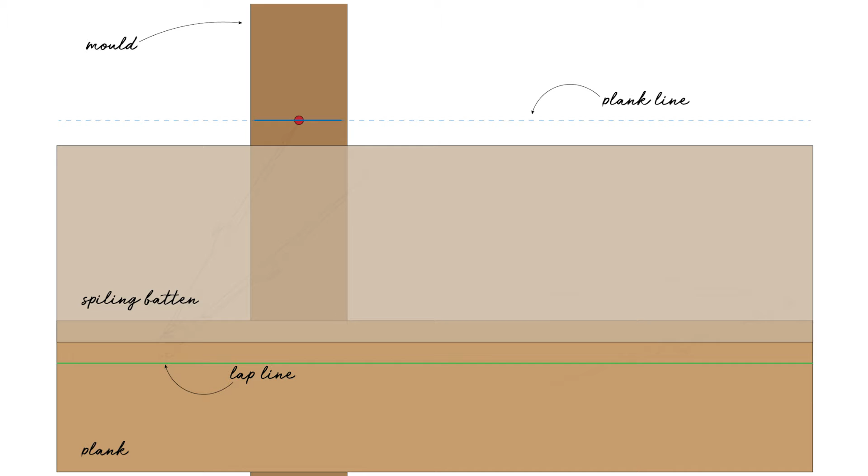You can see that the plank line is also indicated here, and this is the line that you generated when you were lining off the hull. So we'll choose a point on the mould that's also on the plank line. The choice of this point is completely arbitrary. Then, setting the point of our compass on this point, we'll swing a small arc onto the spiling batten.

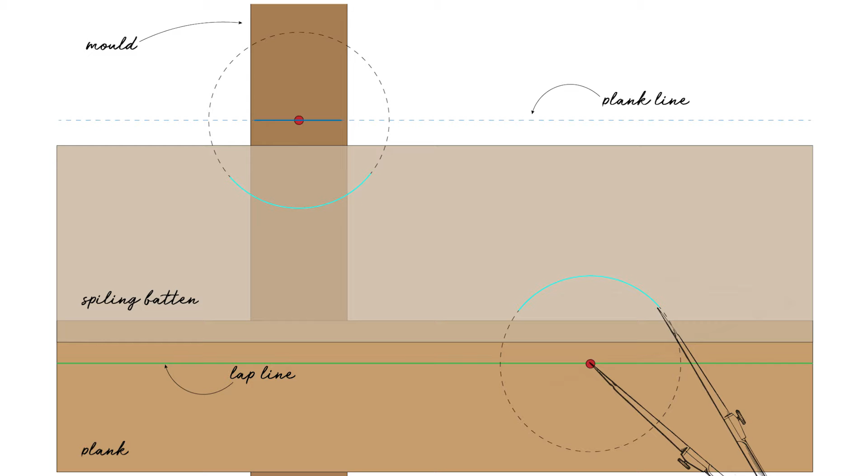So now you repeat this process, but instead we're going to use a point on the lap line below. What's key here is that throughout the spiling process, you're always using a compass that's set to a fixed radius. Otherwise, it won't work. So at this point, we've picked up the information we need from the hull. Now we're going to transfer it to some planking stock.

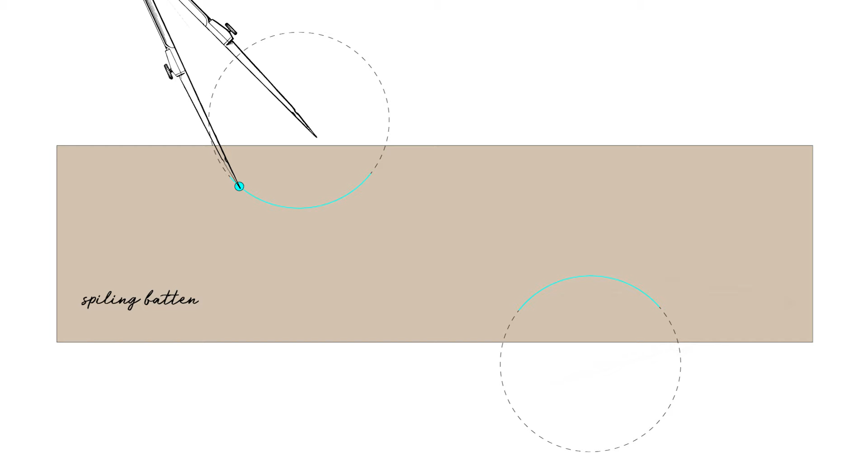We'll again choose an arbitrary point, but this time we'll choose it on one of the arcs that we just struck on our spiling batten. Pivoting our compass on this point, we'll strike a small arc onto our planking stock. Again, it's important that we're using the same compass set to the same radius as before.

Now we'll do the same thing all over again, but using a different point on the same arc. What you expect to happen is that our two new arcs will intersect each other. And thanks to the magic of geometry, these two arcs will intersect precisely at the original point that we transferred from the hull. This is how we get back to where we originally came from. So this process can be repeated now using the other arc that we transferred from the hull.

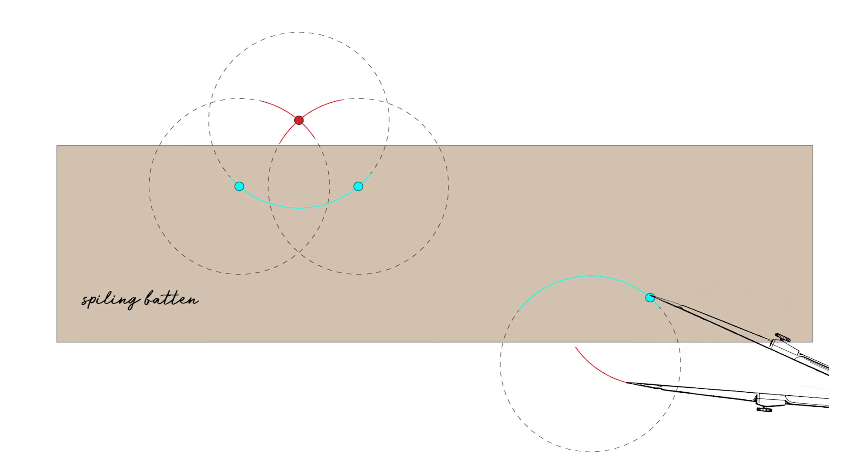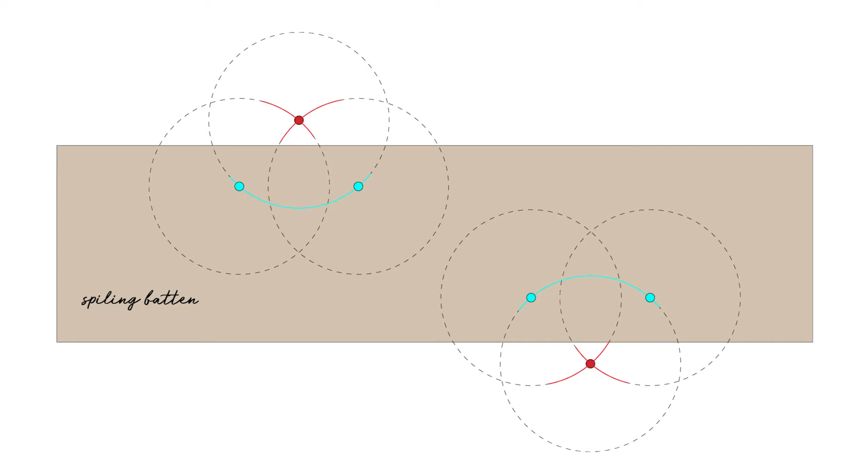So with all the points transferred, we can finally set aside our spiling batten. All we have to do now is fair together the top points and fair together the bottom points, and then cut out the shape of our plank.

So here you can see a lining batten being used to fair in the spiled points, and then the plank shape being cut out. A circular saw really is the tool for the job. Then there's a final shaping of the plank with a hand plane. Then one more planing before installation.

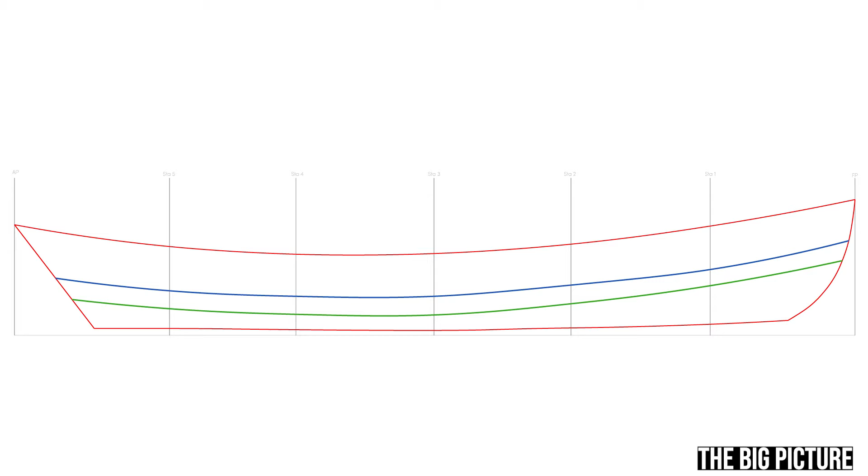So here's the big picture of the spiling process. You can see our boat in profile and a green and blue line representing the lap line and the planking line respectively. Now here's the spiling batten placed between the lap line and the planking line.

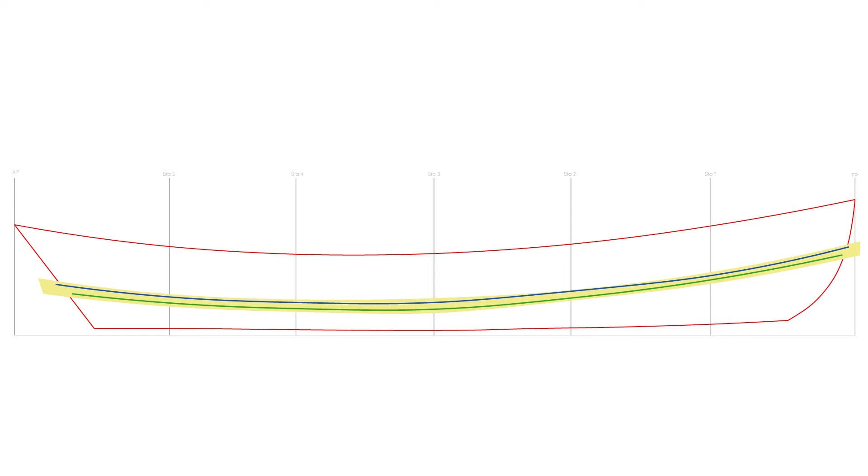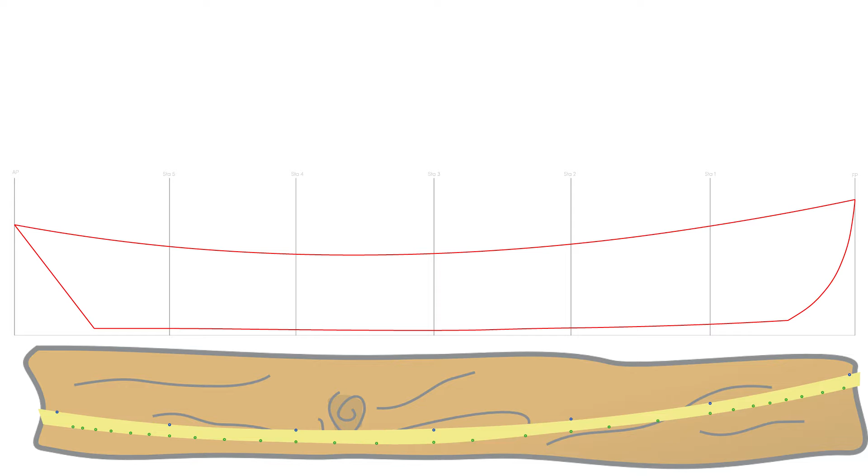What we'd ideally want to do when spiling is to transfer in their entirety the lap line and the planking line onto the spiling batten. But this isn't practical, so instead we approximate these lines with a sequence of points. The spiling batten is then taken off the boat, taken over to the planking stock, and all of these points are transferred to the planking stock using the compass technique described earlier.

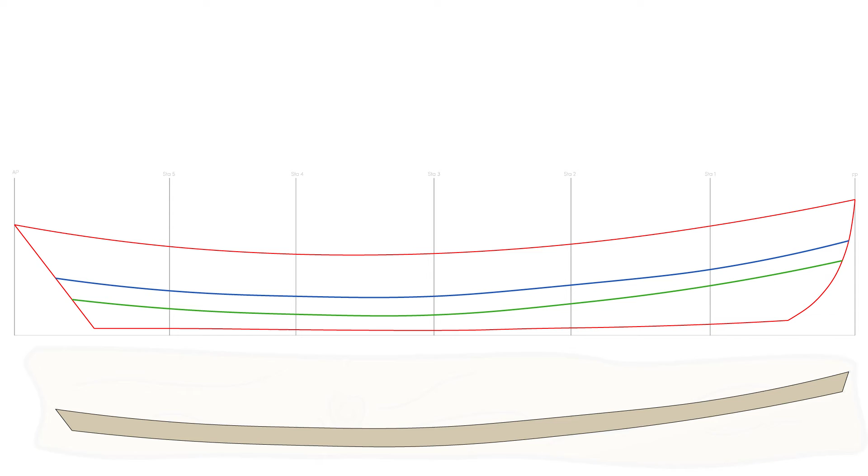The top points and the bottom points are then faired together respectively using lining battens to generate the plank shape. This is then cut out of the planking stock and then offered to the boat for fitting.

So if only spiling was as simple as I've so far explained. So the procedure is straightforward enough. Using a spiling batten and the compass technique, you're transferring information from the hull to the planking stock and then cutting out whatever shape that generates.

Unfortunately, there are some obstacles to getting an accurate result with this procedure, and it all boils down to the shapeliness of the hull. The more dramatic the curvature is in any particular part of the hull, the more challenging it'll be to get the spiling batten to give you reliable results. So what can end up happening is that when putting the spiling batten on the boat, you end up forcing it into position so you can hit all your marks.

This ends up causing a phenomenon known as side set. So what happens is when you take the spiling batten off the boat, it bounces back into its original shape, but because you forced it into position, that now distorts the information that you pulled off the boat. Now there are numerous ways to avoid side set in the spiling batten, and one of them is just to avoid forcing it into position.

But what I found worked best is instead of having one complete spiling batten that ran from bow to stern, I instead pieced the spiling batten together with smaller sections and then gusseted those sections together. There are a number of advantages to doing it this way. One is that you're not wrestling one big noodly spiling batten, which can be a pretty big headache.

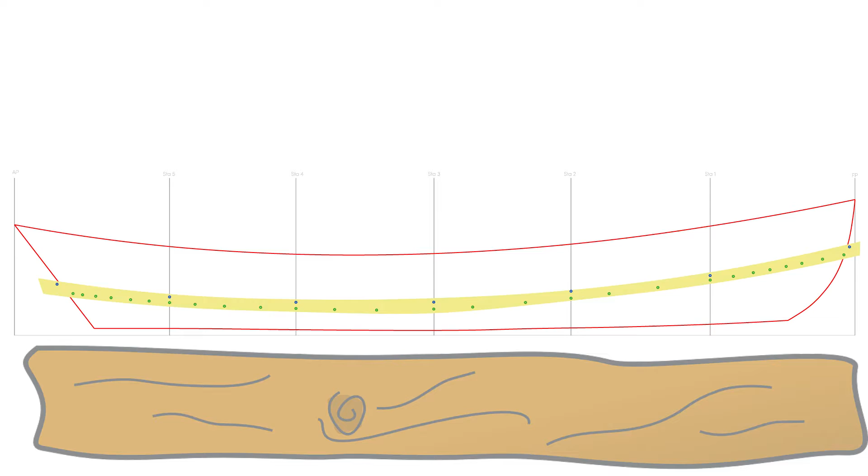Now, in the animation where I showed the overview of the spiling process, there was one glaring inaccuracy. And that is when you take the spiling batten off the boat, put it on your planking stock, transfer all the information and fair in all the lines, the plank shape that you generate is often very different from what you expect. Again, this is due to the fact that you're fitting the plank around a curved and twisting shape.

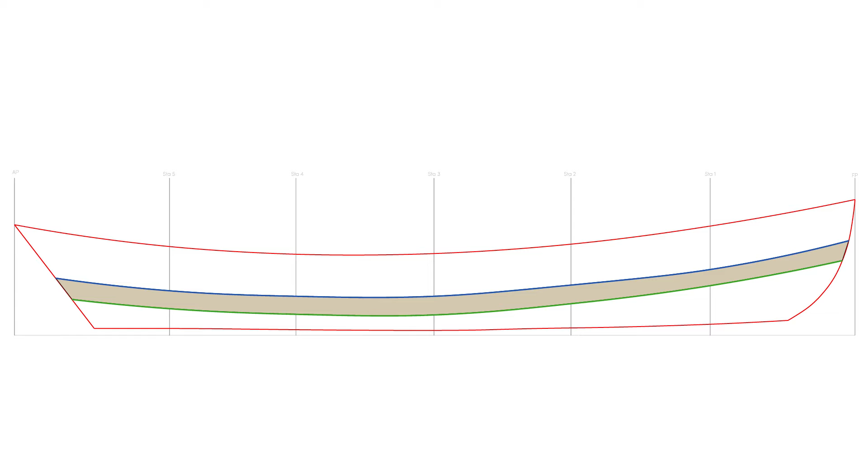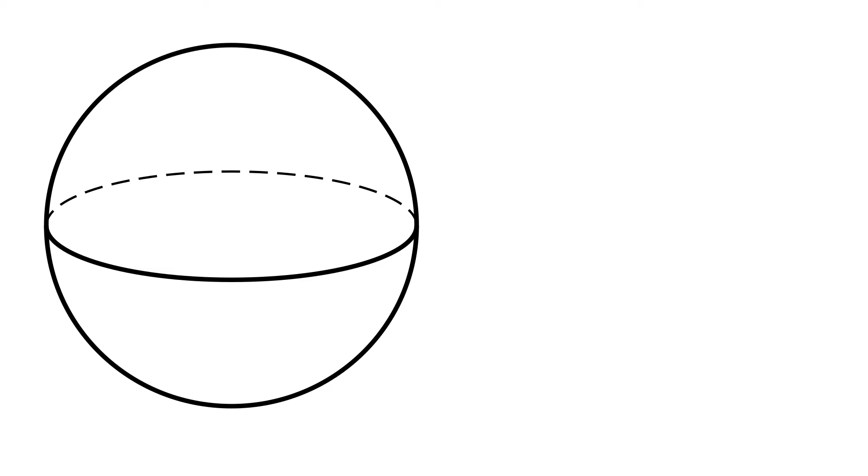To understand how plank shape corresponds to the hull, check out this simple illustration. So what you see here is a simple sphere, and what we're going to do is pretend that the sphere is a boat. Now imagine that we cut a sliver out of our sphere at the equator. We can imagine the sliver as a matching pair of planks, one on the starboard and one on the port. So we'll just look at one half of this sliver, and this will correspond to a plank.

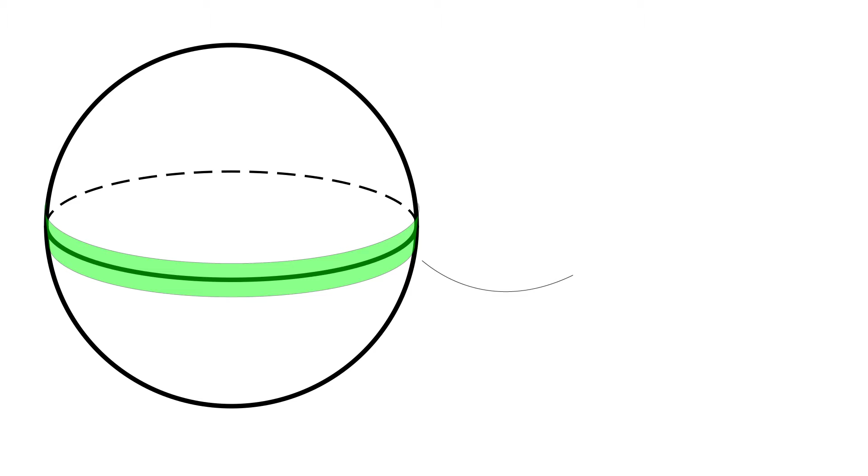Now imagine that we take that sliver off the sphere and we unfurl it. What we'll discover is that it'll unfurl into a straight strip. So the plank shape at the equator is just a straight plank.

Now, if we instead look at a pair of planks that are far away from the equator, we'll see something else happen. When we unfurl one of the planks, we discover that the plank shape is curved. So this is a general principle of plank shape. The farther away you are from the equator, the more curved the plank shape will be. The closer to the equator, the straighter.

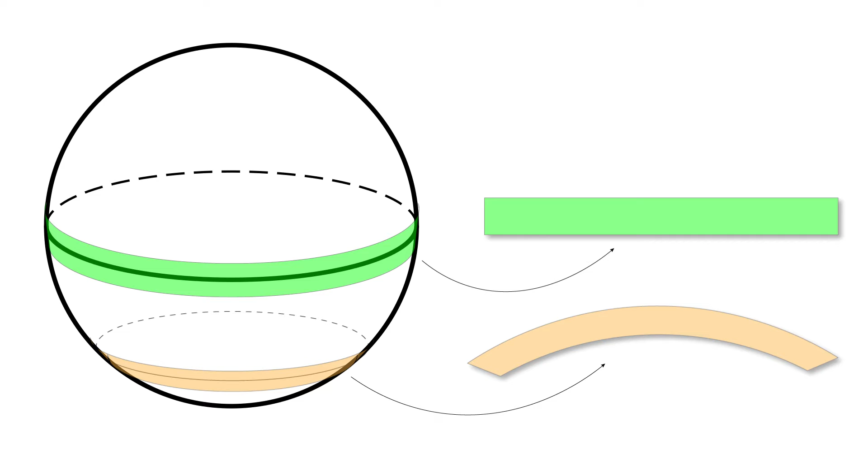The equator for a boat is what is often called the turn of the bilge. This is where you go from the bottom of the boat to the sides of the boat. So just like with the sphere, the farther away the plank is from the equator, the more distorted it is. And as the planks approach the equator, they get progressively straighter.

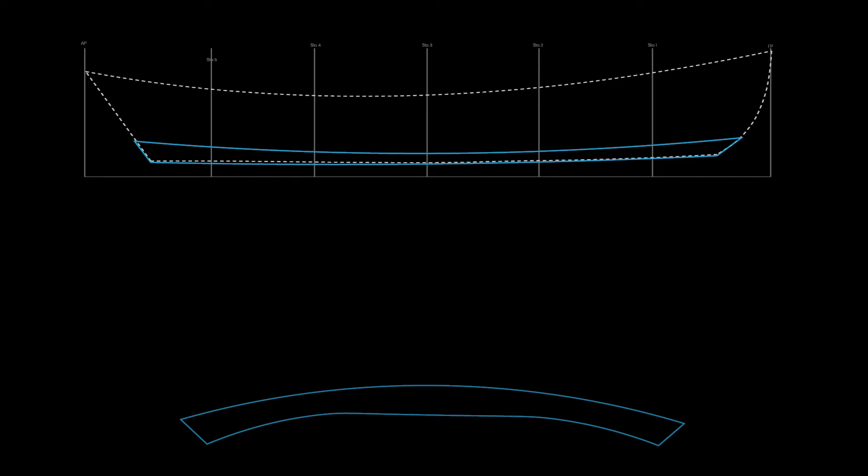So often the bottom planks are bent so that the ends are downward. Then gradually, as the planks approach the turn of the bilge, the plank shape starts straightening out. Once you're above the turn of the bilge, the plank shapes start changing again, but now the ends start pointing gradually upward. Now this is just a rough picture. It varies from boat to boat, but at least it gives you a rough idea of what you should expect out of the plank shapes.

So here you can see the segmented spiling batten coming off of the hull. I'm being very careful not to jostle it or distort it in any way. It's then carried to the planking stock and the scribe lines are transferred. Everything's faired together with lining battens. And so here you can see the complete plank pattern has been spiled out.

We then roughly cut the spiled shape out of the stock. And with 18 total planks, there was a lot of cutting to do. Once the planks were roughly cut out, we'd go back with a hand plane and square up the edges and bring them all down to the spiled lines. Then one last planing down to final thickness.